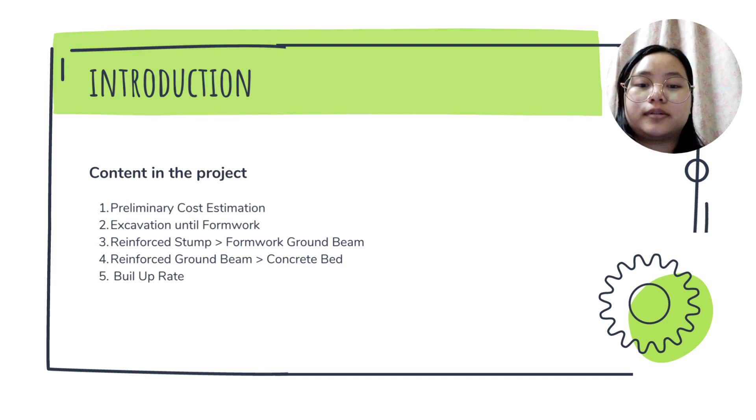You can see the calculation for area. We have for thick brick wall we get RM 2520, and price rate 361.38 meter cube, and then floor area method.

This is for floor area method, and next ground floor plan area. We get 69.38 meter square. Empty area 5.13 meter square. Total area 64.25 meter square. Total cost we get...

2,520 times 64.25 equals 161,910 ringgit.

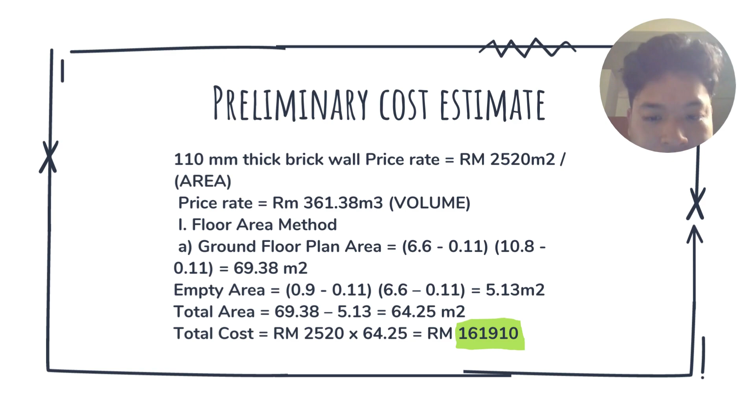Then for building volume method, first building value method from floor plan, we get 360.07 meter cube, and total cost we get 14,220.38 ringgit for total cost.

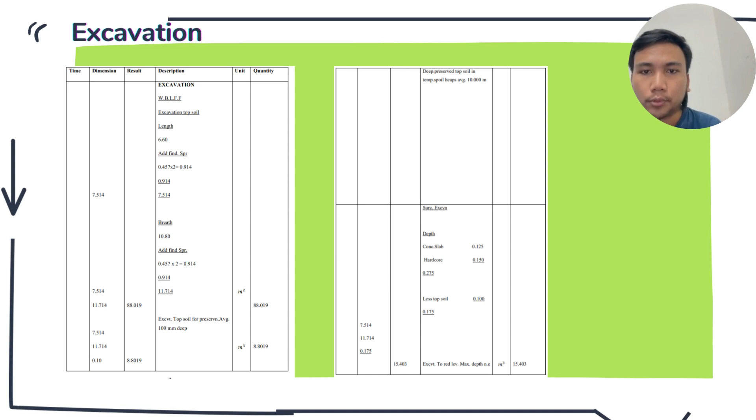For the pit excavation, we add the stump depth for the lean concrete plus pad footing plus stump, and we get 0.325. After that, for the topsoil 0.100, times 14 times 0.914 times 0.914 times 0.425, we get 4.971 in unit meter cube.

Next, for the deduction of the volume, we calculate for the column stump 230 times 230, which is 2 times 0.230 times 0.230 times 0.150, we get 0.016. And the column stump for 125 times 200, we calculate 12 times 0.125 times 0.200 times 0.150, and we get 0.045.

And for the trench excavation, we continue with the length, which is 6.60, and the depth is 0.350. After that, for the last excavation, we calculate 14 times 6.475 times 0.175 times 0.075. We get 1.190 in unit meter cube.

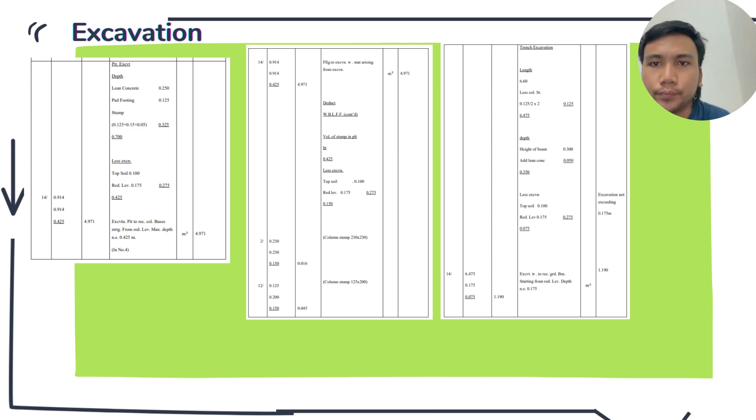Okay, for the concrete works, we calculate 14 times 0.914 times 0.914 times 0.05, we get 0.585 for the concrete grade 15 for the lean concrete, in unit meter cube.

After that, we calculate the reinforced in situ concrete grade 25 in pad footing: 14 times 0.914 times 0.914 times 0.125, and we get 1.462 in meter cube. After that, we calculate for the concrete grade 25 in column stump, which is 12 times 0.200 times 0.125 times 0.475, and we get 0.143 in meter cube.

After that, we calculate for the concrete grade 25 in column stump for C1: 2 times 0.230 times 0.230 times 0.475, and we get 0.050 in meter cube.

And for the formwork, we calculate for C2: 0.65 times C1 is 0.92, and we calculate 12 times 0.65 plus times 0.475, and we get 3.705 for the meter square.

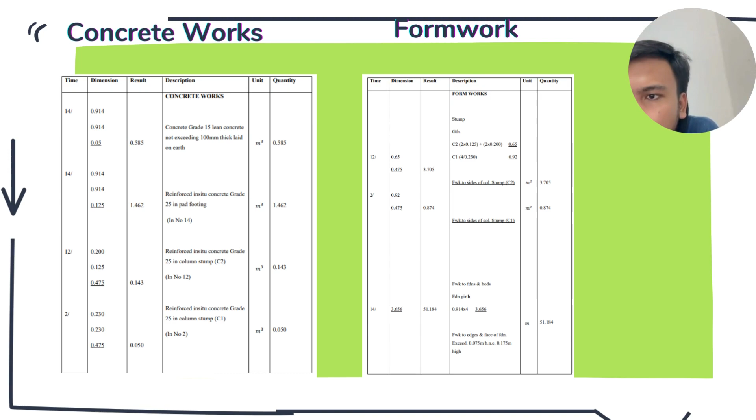For the foundation and beds, we calculate 14 times 3.656, and we get 51.184 in meter.

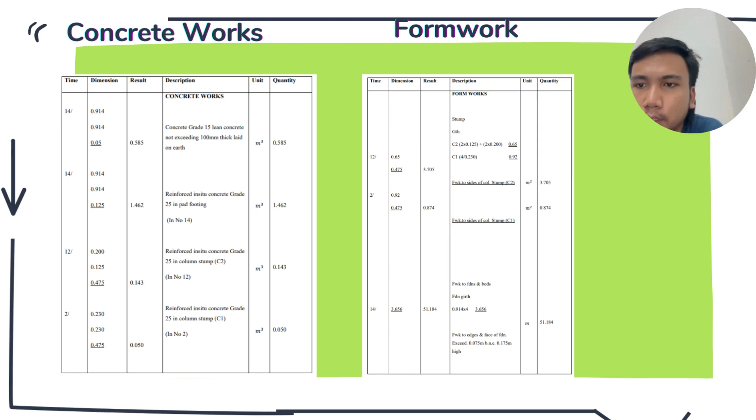For the reinforcing stump, the length of the stump we have to deduct with the concrete cover and also the foundation bars. We get 0.730, and we have to add again with the bend, which is 0.150, so we get 0.880. We multiply with 4 and also 14, so we get the 12 millimeter diameter HT steel reinforcement in column stump.

The result is 49.28 meter kilogram. Also for the length for both of the column, the C1 is 0.230, which we deduct with concrete cover and add with hook, so we get the 10 millimeter diameter MS reinforcement for link in C1 as 28.16 meter kilogram, and for C2, which is 0.125, we deduct with concrete cover and add with hook.

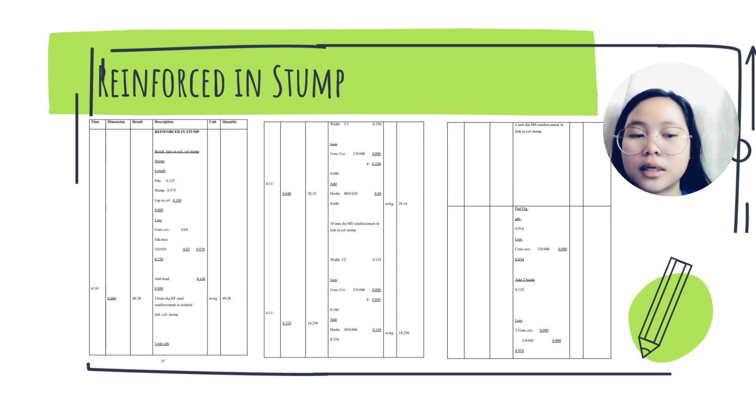So we get the 6 millimeter diameter MS reinforcement in column stump for C2 as 14.256 meter kilogram. For the numbers of bars, the length deducted with 2 concrete cover, which is 0.080, multiplied by 14, 2 and 7, so we get 15 mm diameter HT steel reinforcement in foundation.

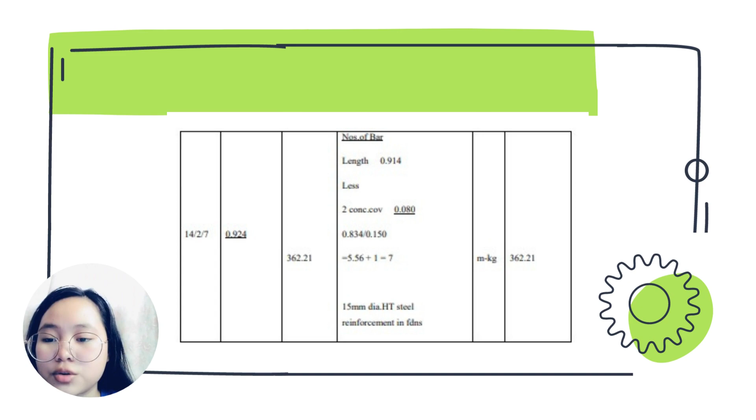The result is 362.21 meter kilogram. For the concrete in ground beam, the length of the blinding to ground beam is 6.60, deducted with 2 stump, and then we get concrete grade 15 blinding with 100 mm thick, which gives 0.249 meter cube.

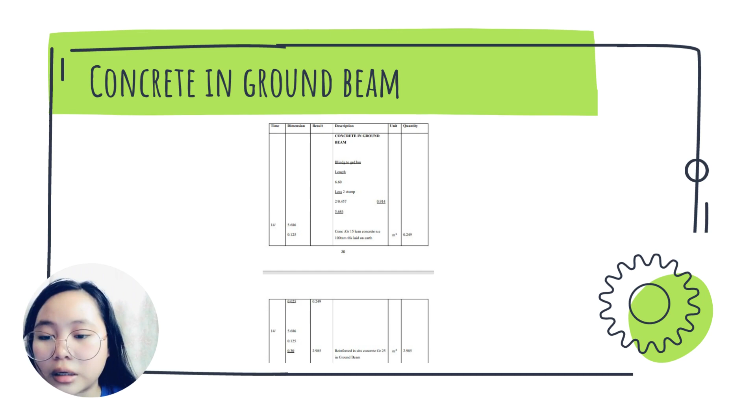Also the reinforced in situ concrete grade 25 in ground beam, the blinding to ground beam length that we get, which is 5.686, we multiply with 14, so we get the grade 25 as 2.985 meter cube. Next is formwork to ground beam.

So the height of the blinding to ground beam, we multiply with 14 and 2, so we get a formwork to ground beam which exceeds 0.135 meter but not exceed 0.300 meter height, so we get 158.208 meter.

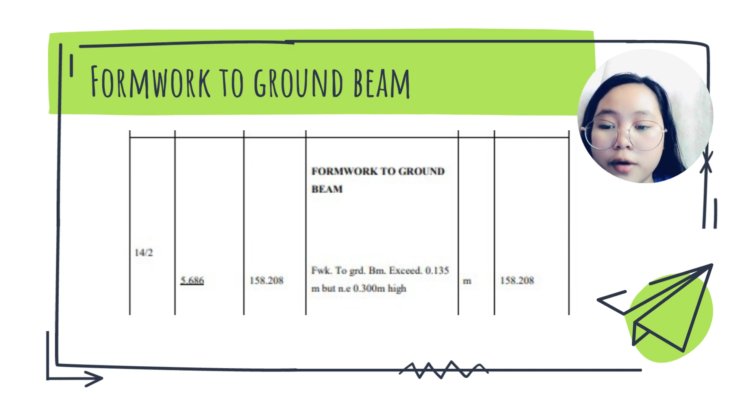Reinforcement for ground beam. For the HT steel, we use 10 mm diameter for the reinforcement in ground beam. 14 times 4 times 6.046, which gives 338.58, and the unit is in meter kilogram.

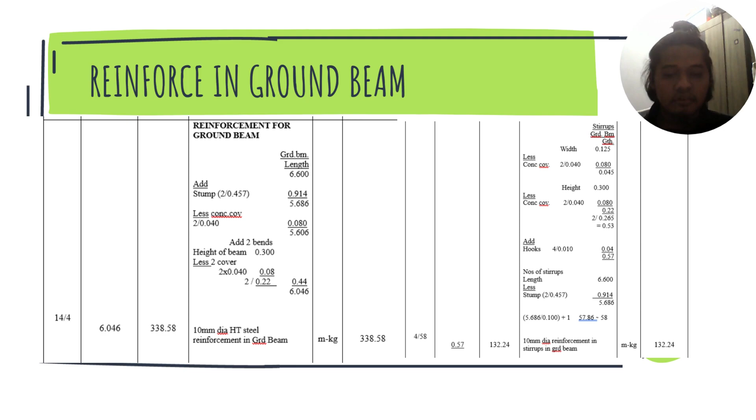For the stirrups, we also use 10 mm diameter reinforcement in ground beam. 4 times 58 times 0.57, which gives 132.24, also in meter and kilogram unit.

For the hardcore, 150 mm thickness hardcore of clean hard broken stones obtained off-site, and the result is 22.77, and the unit is in meter square.

For the damp-proof course, polyethylene not less than 914 gauge horizontal damp-proof course, lap 0.25, and the result is also 22.77, in the same unit, which is meter square.

And lastly, for the concrete bed grade 25 in excavation, 0.075 meter but not exceeding 0.175 meter thickness laid on hardcore, and the result is 2.96, with the unit being meter cube.

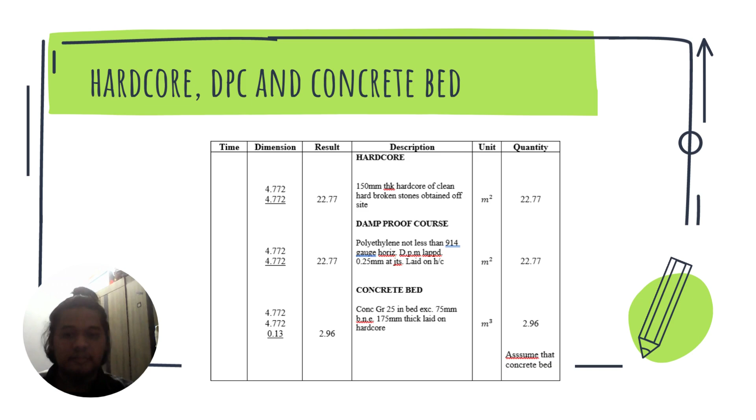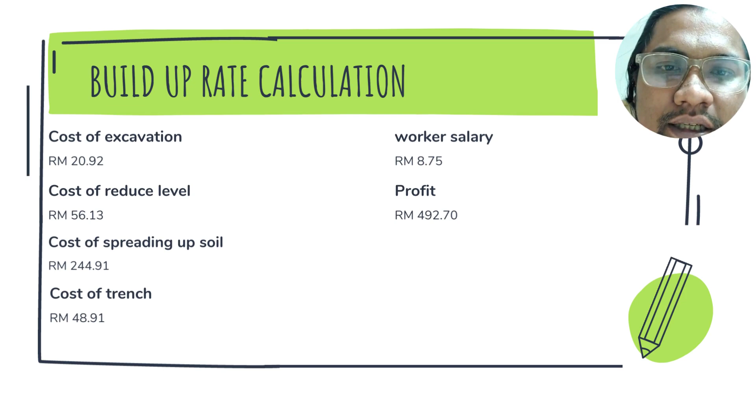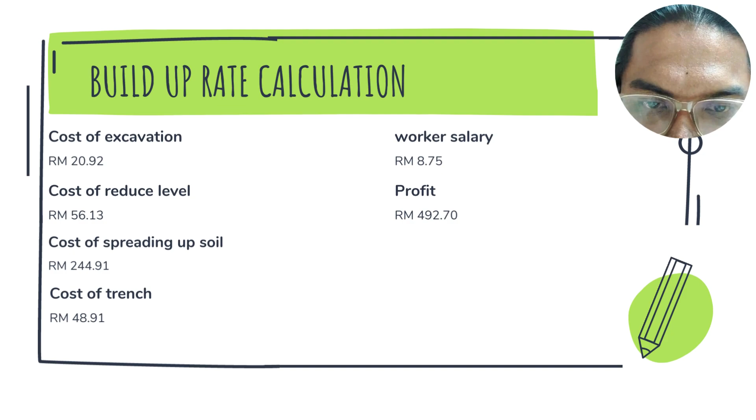So for the first one, the cost of excavation is 20 ringgit and 92 cent. For the cost of reduced level, 56 ringgit and 13 cent. Cost of spreading top soil is 244 ringgit and 91 cent. Cost of trench is 48 ringgit and 91 cent. For the worker salary, 8 ringgit and 75 cent. So for the profit, which is 492 ringgit and 70 cent.

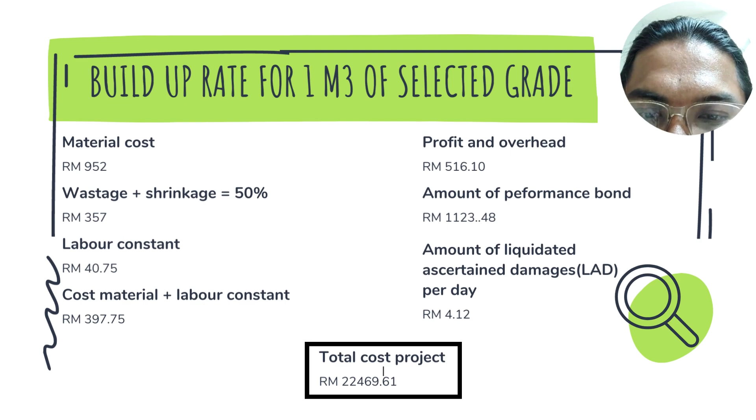Amount of performance bond is 1123 ringgit and 48 cent. Amount of liquidated ascertained damages per day is 4 ringgit and 12 cent. So for the total cost of the project, which is 22,469 ringgit and 61 cent.